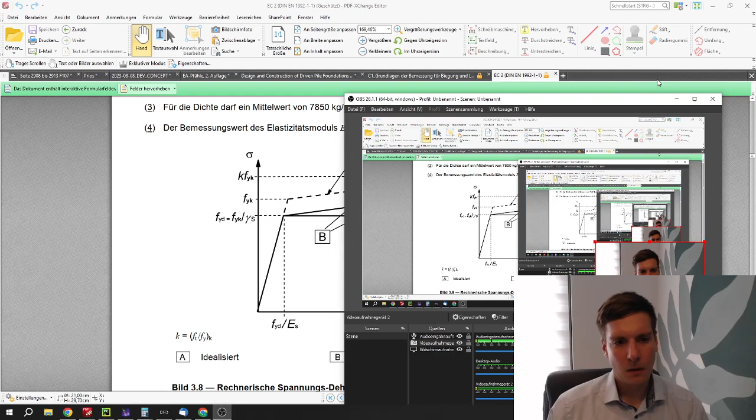There is a potential, obviously, that I made a mistake here. However, I will explain briefly and without further ado what I mean. And I ask, if you feel interested, or if this is part of your responsibility, to take a look at this, because I think it could be potentially hazardous to ignore this mistake or this potential mistake.

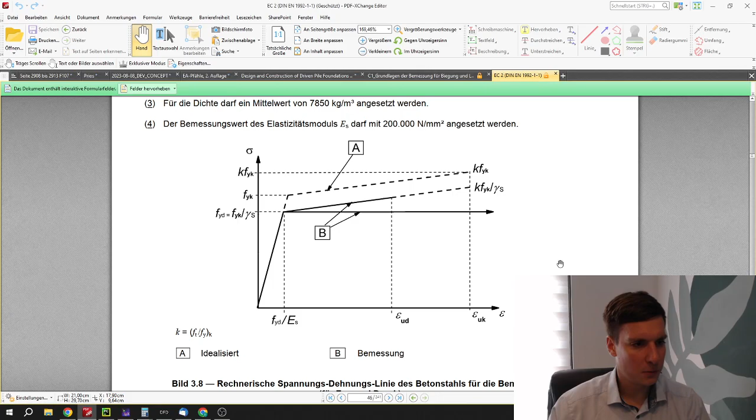Okay, bear with me. So these are the relations that we can use in the Eurocode for the design of steel and concrete structures. I personally have to do a lot with piling foundations. So when we talk about CFA piles, for example, we have this relation between the stress and the strain that we use, and we have an epsilon YD. This is where the elastic part of the deformation of the steel stops, and then we enter the plastic phase.

And to make it simpler for us to use this, especially if we have a huge volume of calculations, the norm allows us to use this simplified version of this relationship to do our designs. So basically after epsilon YD, we can use the FYD for any sort of epsilon that comes after that.

Okay. Now, when we take a look at how this can apply, I had a project recently where I was working on some foundation piles, and I was thinking, okay, what happens if I use these sorts of piles in tension, for example, for a big bridge where we have these anchorage points where we anchor the big cables, like for a hanging bridge. And so I was taking a look at the potential distortion pictures.

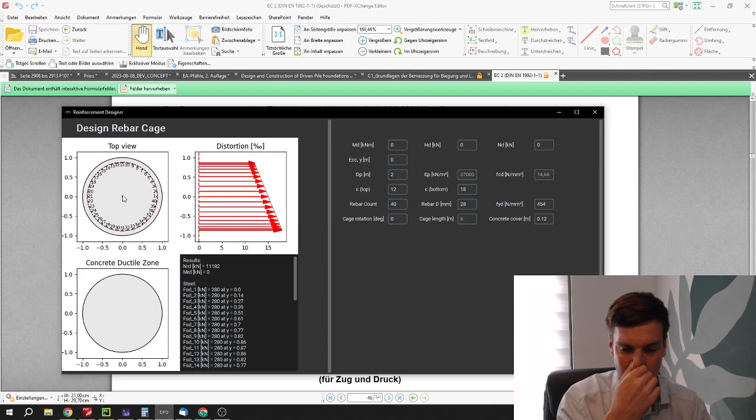Obviously, when we look at it and we do the equilibrium around the centroid of the pile, we would assume that we get a bending moment of some kind that would introduce this sort of distortion. Because if there were no bending moment, it would probably look something like this. But obviously, since there is some sort of bending introduced and it's tension and bending, we would expect some moment that would be introduced to achieve this.

So when I did the calculations, my program just said there's zero bending going on. And so I was thinking, what is going on? I was looking at my source code a lot of times, and I was thinking this must be something very stupid, like I must have made a very stupid mistake in my programming, and I wasn't expecting it to be potentially something that is caused by the norm.

And so out of frustration at some point, I just said, okay, just plot me all the steel forces and their respective y coordinates, so that I can export them to Excel and see what's going on, to make a manual equilibrium of forces around the centroid. And when I plotted these forces, I didn't even need to do this, because I already saw that all the steel forces here are all the same. So I was thinking, what does this mean?

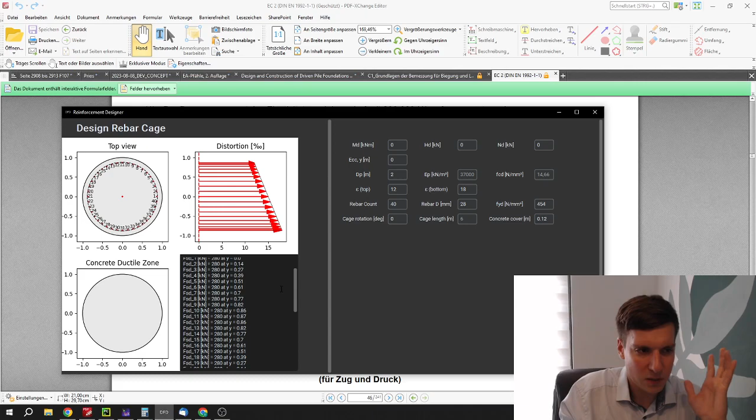And obviously, this is something that I implemented years ago. This is not something that I questioned. I was just like, okay, I can use both, so I'm just going to use this one because it's easier, and I'm not going to waste too much time thinking about what I'm using, because this is what the norm is for: you use it and you expect that the results are going to be fine.

And so I use this, and this also explains very well what's going on. If we go here, like where the mouse is, then we assume that this will be 12, and here's maybe 18. What we see is it will just return us the FYD for both epsilons.

And obviously, if I have a rebar cage and this is usually symmetrical, or maybe it has an uneven amount of rebars, we would expect a little bit of a difference. However, if it's symmetrical, then I would assume that if all rebar diameters are the same, then all of the forces are going to be the same. And this is what we see in the results. So it's totally clear why this happens.

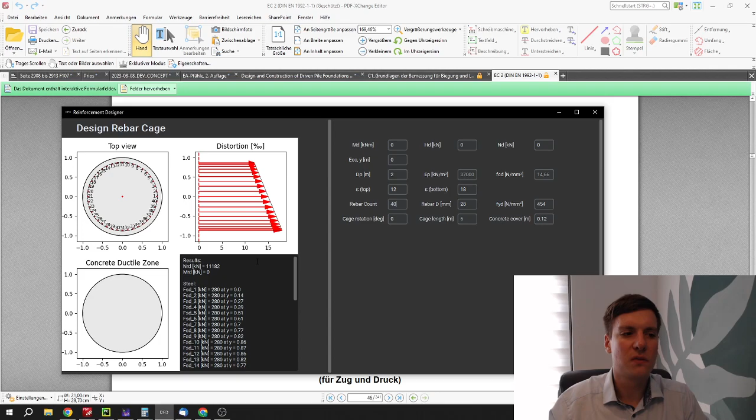And then from there, if you're considering this, you just see that these forces are technically all the same force. Then you already know, okay, 100% I understand that there cannot be any mistake here. So the calculation is totally correct, even though it's totally obvious that there must be some sort of bending going on, even though we don't see it in the results because of this horizontal relation here that was introduced in the norm.

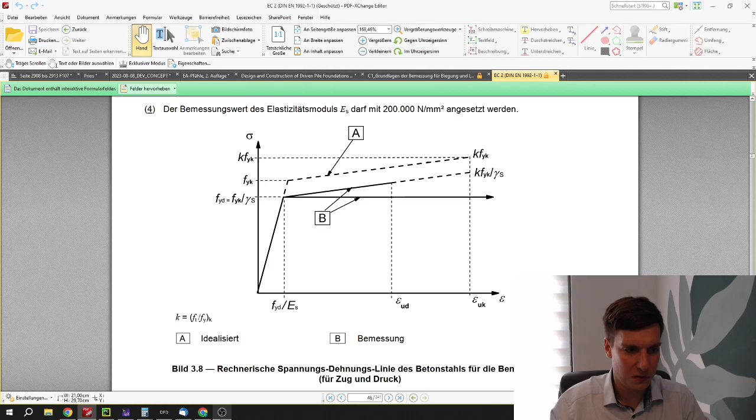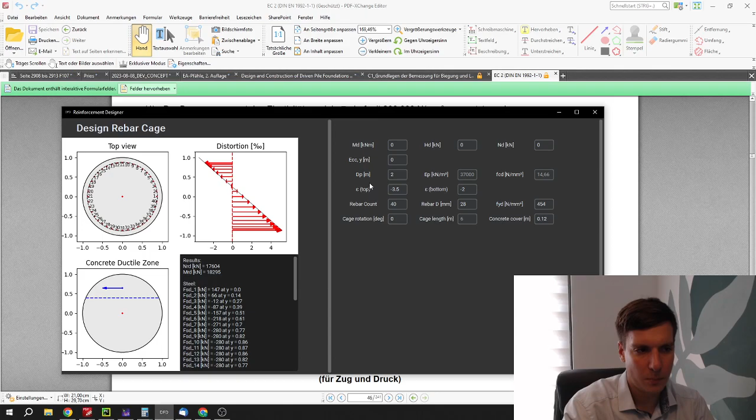So then I was thinking, okay, this is a special case, and it's not something that I have calculated in practice, but what if we take a look at the normal case where we just have a compressed pile? So we say 3.5, and this would be something as you would expect if you have just a bending sort of thing, but obviously piles and piling foundations are mostly compressed, so I would expect a distortion that more or less looks something like this.

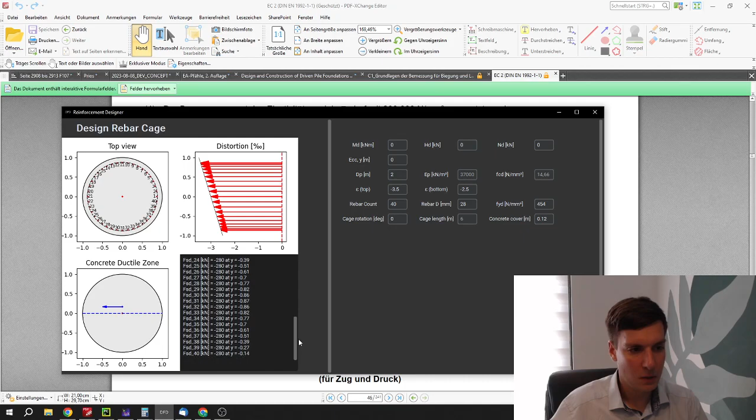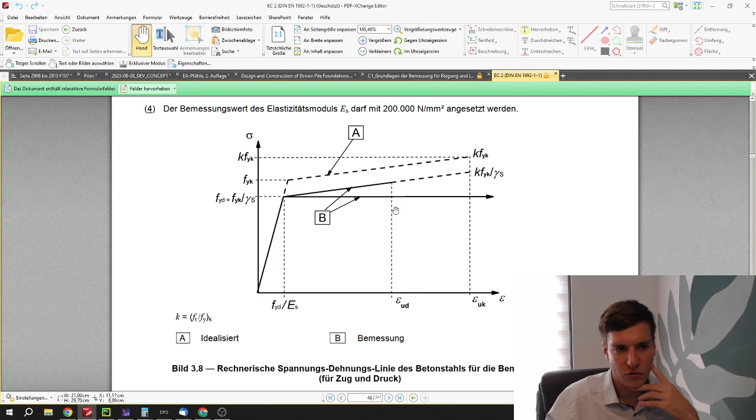There we get some sort of bending moment, and when I was taking a closer look, I also saw here that the forces are all the same. So I was at least sure that there is no part of the rebar that is potentially lost. I haven't gone super deep into the consequences of what this means. However, we obviously know that this must be something that is wrong, and this is just due to the fact that this relationship here is constant after a certain epsilon. This is what creates this.

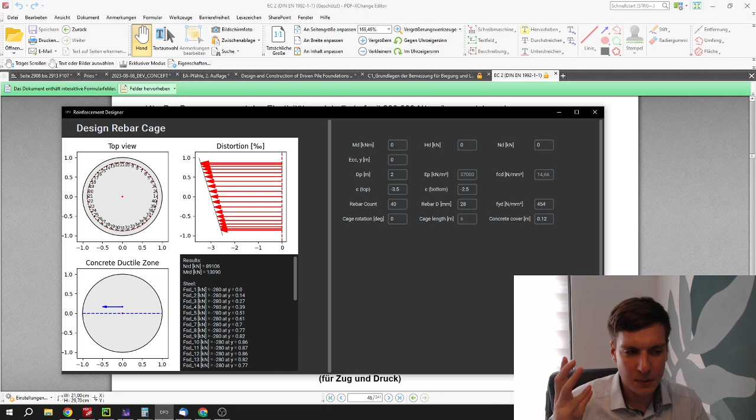So I was thinking, and I don't know if this might be a mistake on my part, but I can just say I will go with my eccentricity right into the middle of the centroid of the volume of the FCD, of the concrete pressure zone, so that this will not have an impact on the overall bending moment. So I can do this right now. And what you see is basically now the red dot is under the blue one. And so the concrete doesn't have an influence anymore on the bending moment.

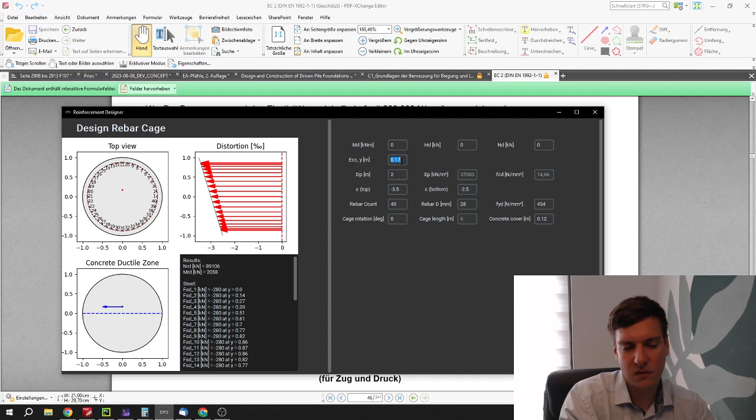And we see that with this situation here, we have basically around 2000 kilonewton meters, which is significant compared to what we had before that was left. So this is what I assume to be what is left out. So we go back, 2,000 in comparison to 13,000, so it's roughly a 15% mistake that we would expect if my presuppositions are correct.

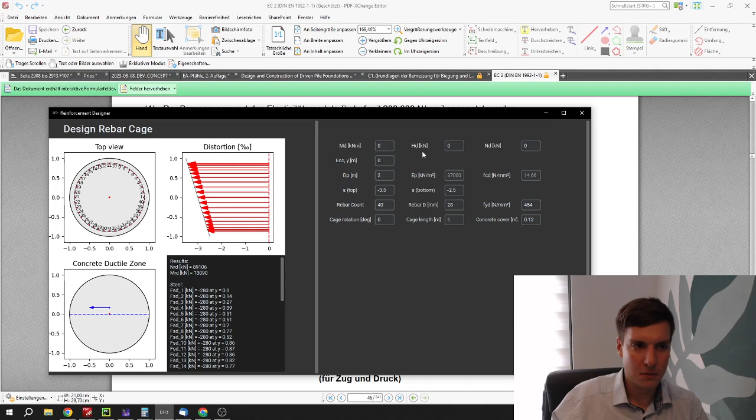So I think 15% is significant enough to talk about it and to open a discussion, and hopefully this will be very productive.